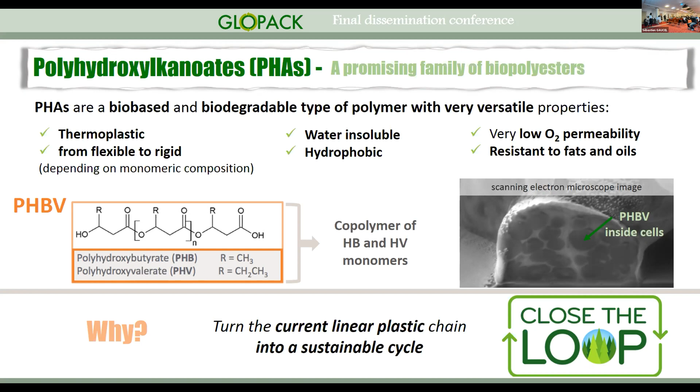They are also water insoluble, resistant to fats and oils, and have a very low oxygen permeability, which are all good characteristics to be used as a packaging material. In specific, PHBV is a copolymer of HB and HV monomers, and they have improved mechanical and thermal properties in comparison with the homopolymer PHB, which is the most studied PHA. And it is important to overcome the technical obstacles associated with PHBV production, to turn the actual linear plastic chain into a sustainable cycle.

The commercial PHAs are currently produced using pure cultures, and they are fed with high purity substrates. In this type of process, there is a need for sterility and strict control, which means they are high energy demand processes. And the cultures are usually fed with pure glucose or corn steep liquor, which are pure feedstocks, and they account for almost 50% of the total production costs. So this makes PHA have a very high price to be used as a commodity material.

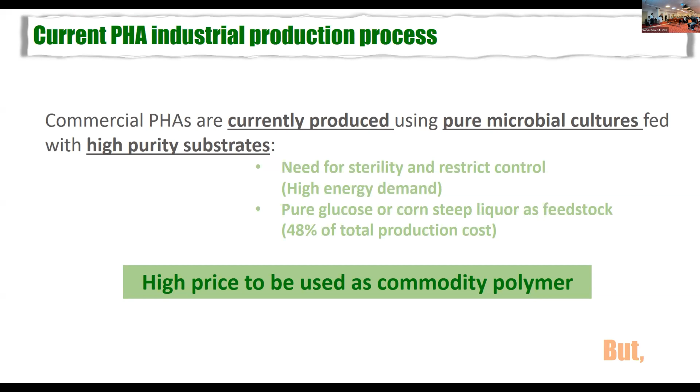Over the past 20 years, an alternative process based on the usage of mixed microbial cultures and residues has been developed. So I can tell you straight away that it is possible to produce PHBV from various agri-food feedstocks. This process usually comprises 3 steps. We have an acidogenic reactor here, where the organic carbon of the feedstock is converted into a mixture of soluble fermentation products, which are PHA bioprecursors.

And then we have 2 aerobic reactors. The first one, where a mixed microbial culture is selected based on the PHA storage ability through inducing periods of feast and famine. And then we have the PHA production, where this culture is inoculated and fed with the soluble fermentation products produced in the acidogenic reactor until they achieve their maximum PHA capacity. Then the PHA is downstream processed, which means it is extracted, purified, and dried, and we obtain a pure PHA at the end.

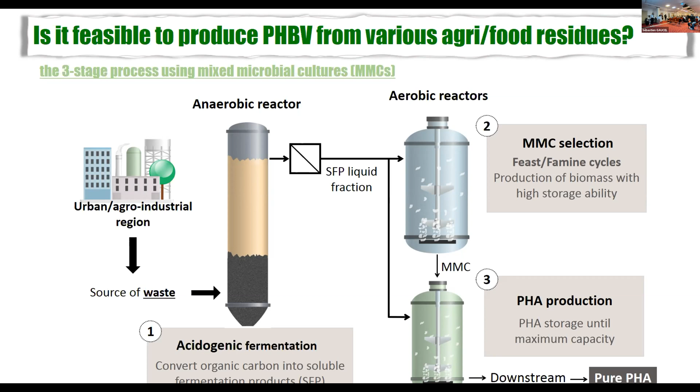During the Glopack project, IBET was in charge of optimizing the PHA production efficiency and producing 50 kilos of PHBV. We were mostly working on work package 2 of the project, and we used fruit waste as feedstock. This feedstock is globally produced in large volumes. It accounts for up to 60% of the fruit production. In our case, it was supplied by a Portuguese fruit and vegetable processing company, and it is obtained from the stored barrels that do not comply with the criteria to be processed.

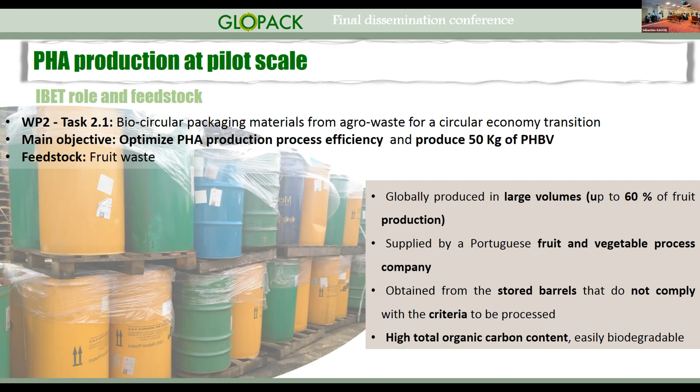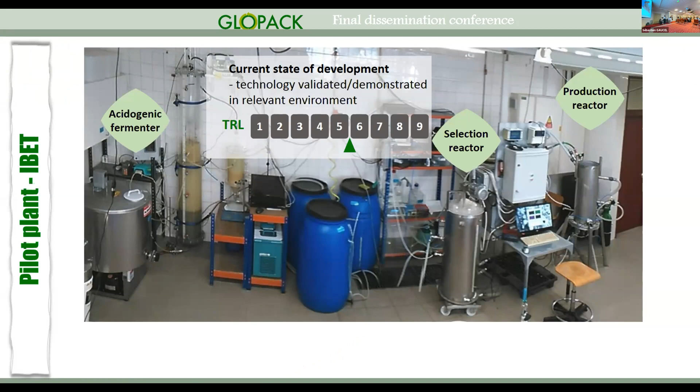This feedstock has a high total carbon and organic carbon content, which means it is easily biodegradable, which increases the potential to be converted into soluble fermentation products and, of course, into PHBV. So here you can see our pilot plant. We have 3 reactors to perform the 3 steps of the process. We are currently at a TRL between 5 and 6.

We operated the first reactor, the fermentation reactor. It is a 60-liter upflow anaerobic sludge blanket reactor. We operated it at 30 degrees, and we adjusted the pH, trying to control the PHBV composition, which means the HV monomeric composition of the PHBV.

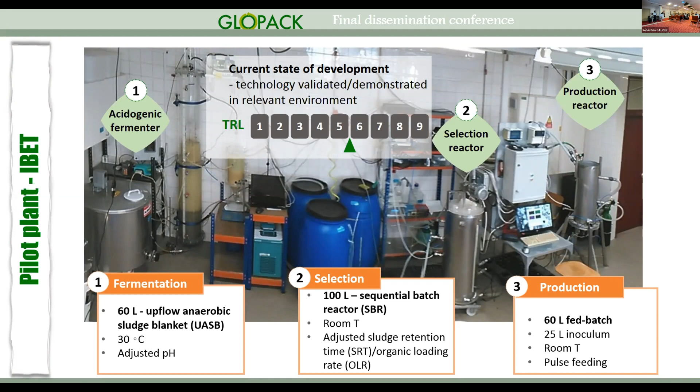Then we have a selection reactor, which is a 100-liter sequencing batch reactor. This reactor was operated at room temperature, and we adjusted some operational parameters such as the sludge retention time and the organic loading rate, trying to optimize the efficiency of the culture. And then we had the final reactor, which was a 60-liter fed-batch reactor inoculated with 25 liters of inoculum from this reactor. It was operated at room temperature, and the culture was pulse-wise fed.

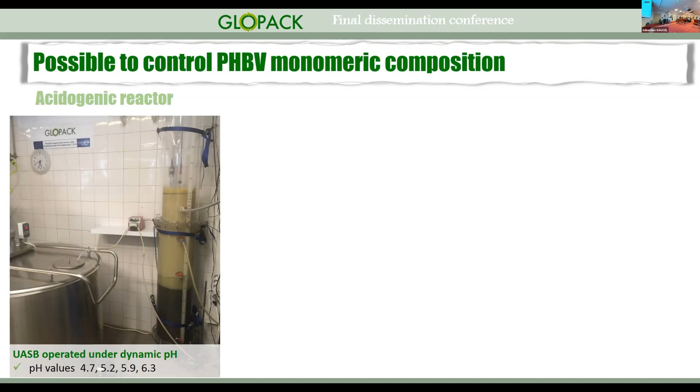So the first research work that we did during the Glopack project was to understand if it is possible to control the PHBV monomeric composition with one single system and using the same feedstock. So to do that, we operated the first reactor under dynamic pH, trying to change the soluble fermentation products produced. So we tested 4 pH values.

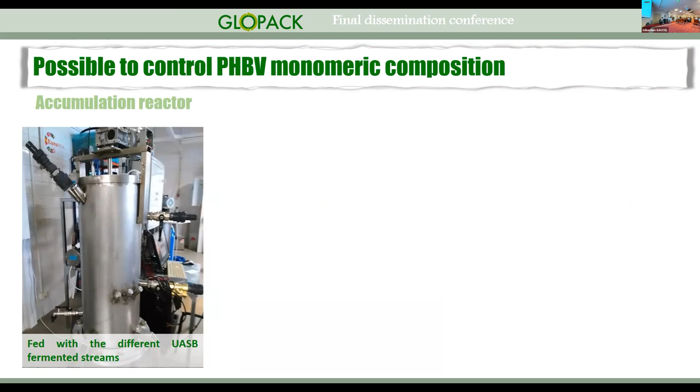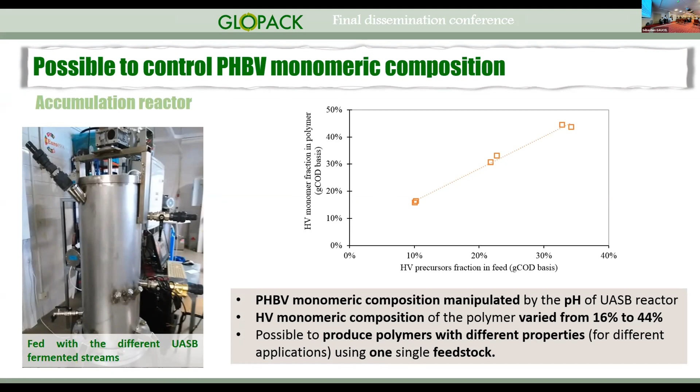Then we tested each one of these streams in the production reactor. So we fed the culture with those streams. And we saw that actually the PHBV monomeric composition can be manipulated by the pH of the UASB reactor. You can see here that the HV monomeric composition of the polymer varied between 16 and 44%. So it was possible to produce different polymers with different properties, which means for different applications, using one single feedstock and one single system.

Then we tried to control the sludge retention time and the organic loading rate of the selection reactor, this reactor here. So we operated 2 SBRs with 2 sludge retention times, 4 days and 2 days, and we 4-step increased the organic loading rate until a maximum of 14.5 grams of COD per liter per day.

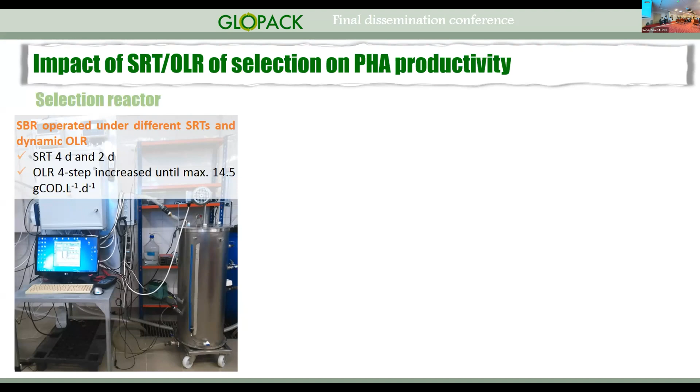We saw that the biomass productivity was similar for both reactors, for each organic loading rate, but the culture selected at 4 days of SRT had a higher PHA accumulation capacity. So this reflected on the global productivity, which was 80% above that achieved for the 2 days of SRT. So we saw that higher SRTs favored the global process performance.

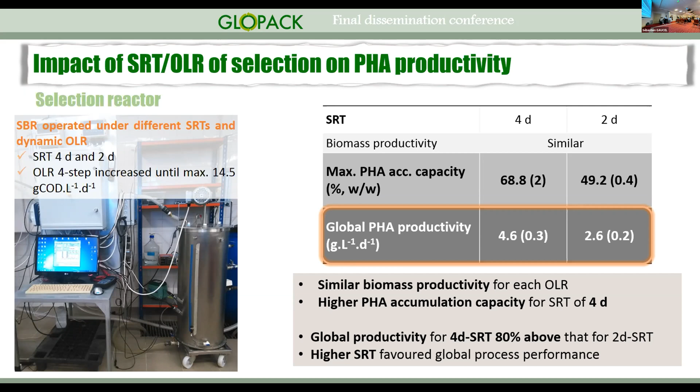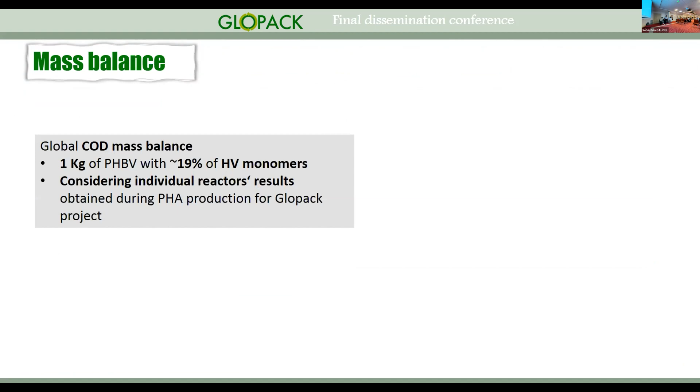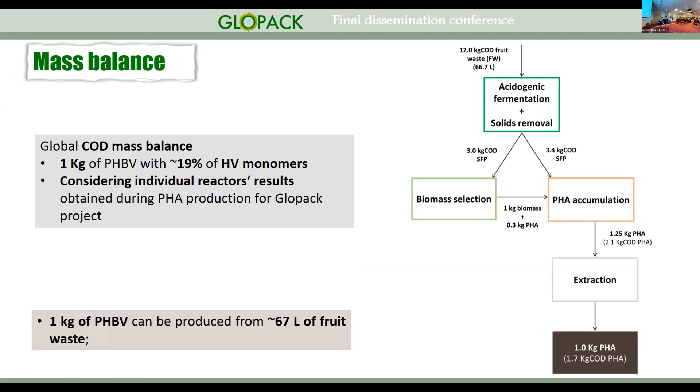We also did a mass balance considering the production of 1 kilo of PHBV with 19% of HV monomers, and we considered the individual reactors results achieved during the PHA production for the Glopack project. And we saw that 1 kilo of PHBV can be produced from 67 liters of fruit waste, which is a result that is in line with the literature results.

During the pilot plant operation, we faced some roadblocks. We tried to have a solution for each one of them. First, we saw that the feedstock had a high solids content. So we had to install a decanting system in continuous mode to filtrate the feedstock after the acidogenic fermentation and to have better results in terms of purity of the polymer. Then we saw that the feedstock varies along operation because it is a waste, so it is normal. But the culture was very well selected and adapted well to the variability of the feedstock.

We had some problems in the extraction process, which was done by another company. Those problems were mostly related to the variation of the culture along operation to give a response to the feedstock variability. And they also saw excess of foaming and heating at a certain point of the extraction. So we had to tightly control the PHA content on biomass, adapt the extraction method and do the extraction in smaller batches. Then we saw that sometimes there is a high level of impurities on the polymer. So we installed a second round of purification.

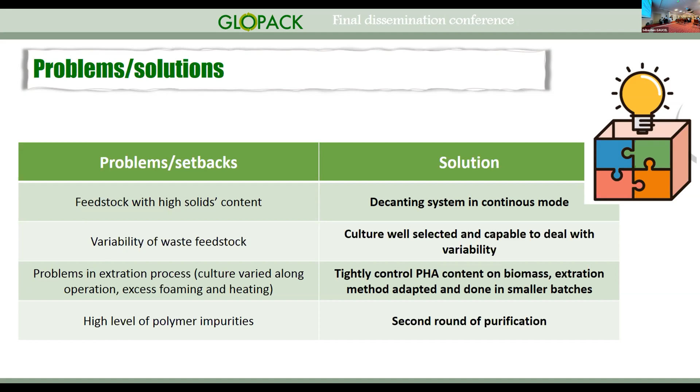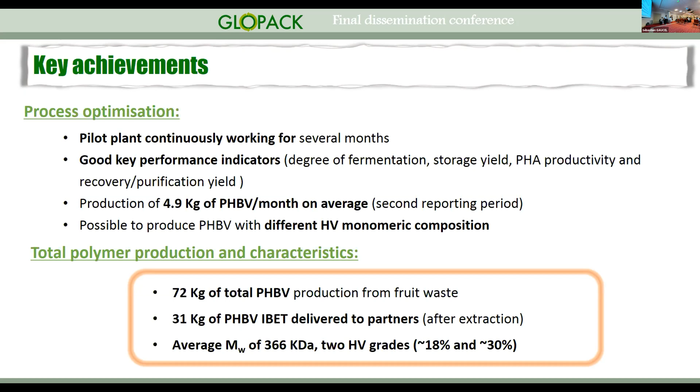In sum, we were able to continuously operate the pilot plant during several months, and we achieved overall good key performance parameters. We produced an average value of 4.9 kilos of PHBV per month, and we saw that it was possible to produce PHBV with different monomeric compositions. In total, we produced 72 kilos of PHBV from fruit waste, and we delivered to partners 31 kilos after extraction. The polymer had a good average molecular weight, and we sent polymers with 2 HV grades, 18% and 30%.

For the future, we think that it is important to optimize some operational conditions and to analyze the possibility of recycling processed wastewater to decrease the tap water consumption, to study online monitoring techniques for better process control, to develop predictive models for process optimization and to design large-scale plants, and of course to demonstrate the PHBV production from different organic residues at a larger scale.

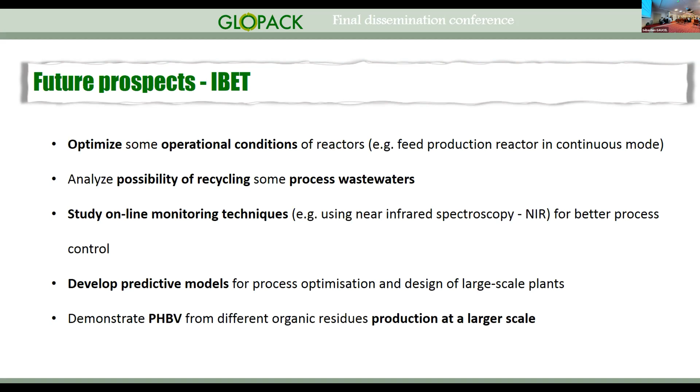Now we're going to do the transition for my colleague. That's right. Simone. Thank you very much, Mario. Thank you very much. We're going to pass straight on now to Simone Nortilli. Good morning, Simone. Good morning. Can you hear me? Yes, we can hear you. Okay, perfect. Do you want me to share my screen, or how do you want to proceed? No, we don't need to do that. You can just say next, please. Okay, so next, please. Perfect. Thank you for the introduction.

First of all, good morning to everyone. I'm Simone Nortilli. I'm going to talk about the Innoven role inside the Glopack project and especially the PHA production at pilot scale. As Mariana explained to you before, together we were in task 2.1, so in the PHA production, but the main difference was the feedstock, which was made of agricultural residues, and especially corn cob. Next, please, James.

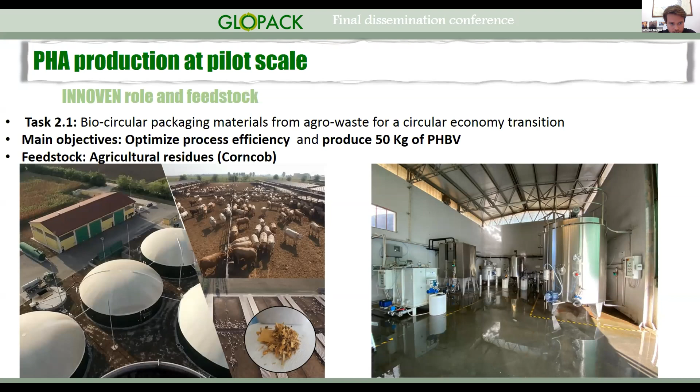As you can see, just to have the overview of the plant for the operational condition, we were inside an agricultural society very close to Verona, inside which there were 2 full-scale anaerobic digestion plants, and we were fed daily by this company for our activities.

Next, please, James.

This is just to make you understand how we proceed, the general overview of our pilot plant scale. So starting from the early stage, you could see that the material was fed inside this external storage tank and subsequently ground and pumped before being charged inside stage 3, in which we obtain the fermentation for the volatile fatty acid production, which is an important step for the mixed microbial culture and PHA production.

Then we had to separate this fermentative product by the use of a screw press and divide the solid fraction from the liquid one containing our volatile fatty acids. Just to show you that the current state of this development and the pilot plant in terms of TRL is between fifth and sixth.

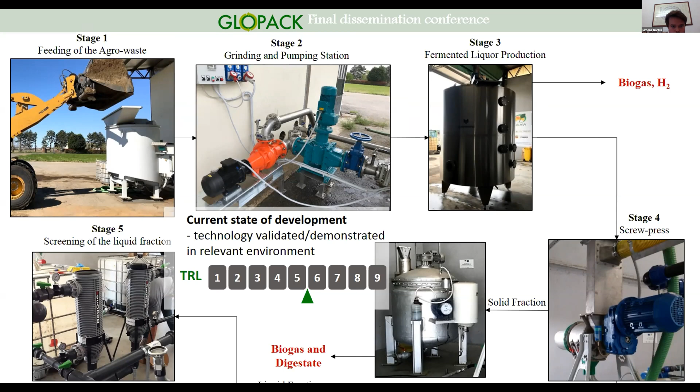Please, the next one, James. No, one before. The one before, okay, perfect.

Then once we recover the volatile fatty acids, this has to go inside the 2 stages 6 and 7, in which we first select the biomass able to store the PHA, and then we accumulate. So we actually produce the PHA that you can see in stage 8 and 9, in which we try to thicken the biomass, so concentrate the biomass as much as we could, and then it's ready for the downstream process, so for the extraction and purification that you will see later.

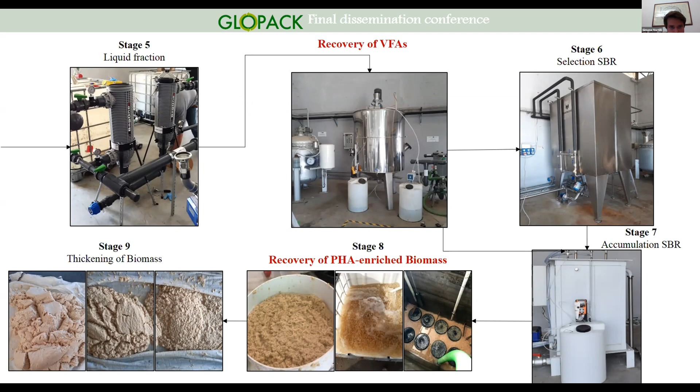So in terms of results achieved, this is the fermentation unit, a big fermentation unit with a volume of around 4 cubic meters for the production of VFA. The operative conditions that we adopted were an HRT of 4 days, always conducted in anaerobic conditions at a mesophilic temperature, so between 35 and 37 degrees, with an organic loading rate of around 18 kilograms COD per cubic meter.

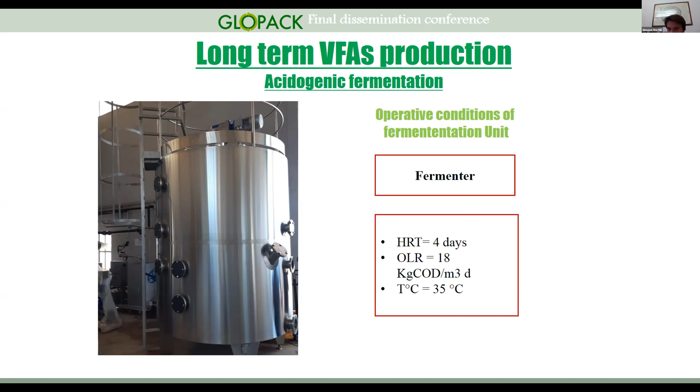Next one, please. In terms of volatile fatty acid production, this is the overall production that we kept in grams O2 per liter, which is around 10, and as main product acetic acid, followed by propionic acid and the other long chain volatile fatty acids. Next one, please.

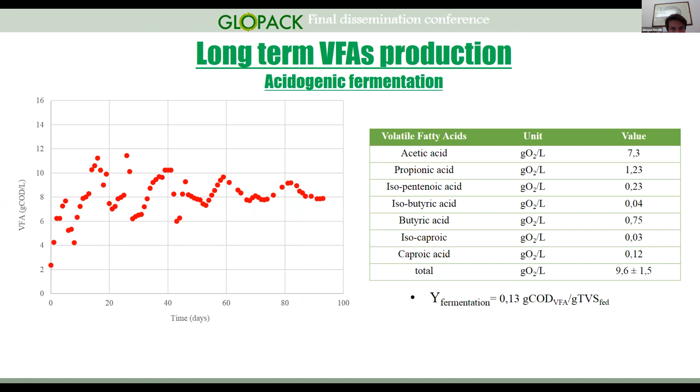After we obtain the fermentative product, this has to be filtered in order to have a proper selection and accumulation process. And we faced here the first problems related to this material. As you could see, in fact, the total solids in the liquid fraction were still high, even though we tried to filter using the serial filter you could see from the picture. And a lot of total suspended solids and inert material.

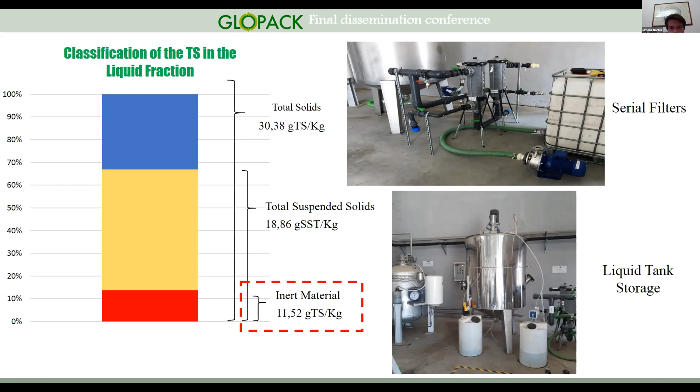So, for instance, fibers, salts, and probably lignin coming from the agricultural residues were still present inside this liquid, and we were trying to solve this problem. Next one, please.

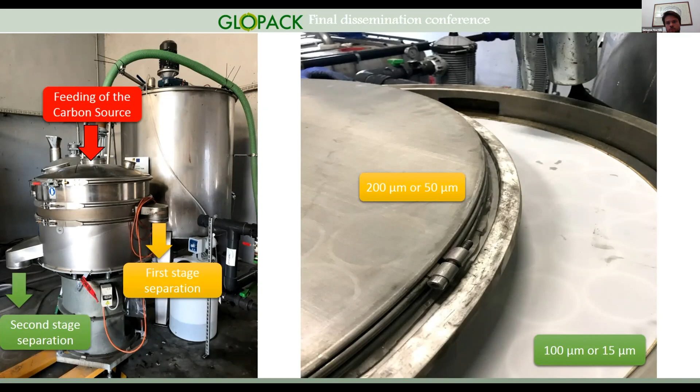We tried to adopt this system, but it wasn't significantly efficient, because in terms of total solids and total suspended solids, we decreased them a little bit, but not completely. And in terms of distribution of solid and liquid phase, we could see that the volume of the permeate recovered was best achieved by using a 100 micrometer first stage layer and a 50 micrometer second stage layer. So further analysis on advanced filtration technology has to be developed.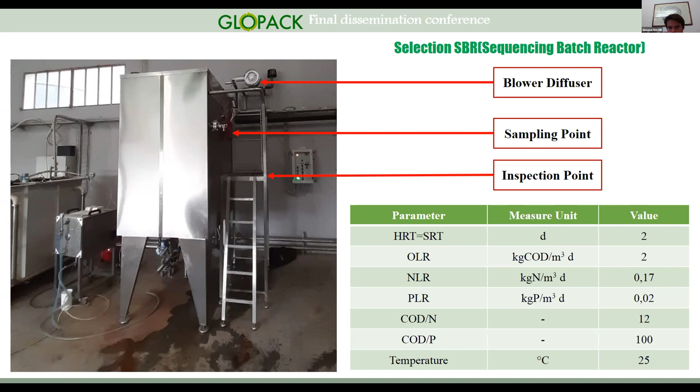Especially, we kept an HRT equal to SRT of 2 days, and an organic loading rate of 2 kilograms COD per cubic meter per day, at a temperature kept constant at 25 degrees, with the nutrient ratio that you could see from the table. In terms of volume, it's a big selection batch reactor because, as you could see, it was around 2 cubic meters. Next one, please. And this one is the following step of the process, the accumulation SBR.

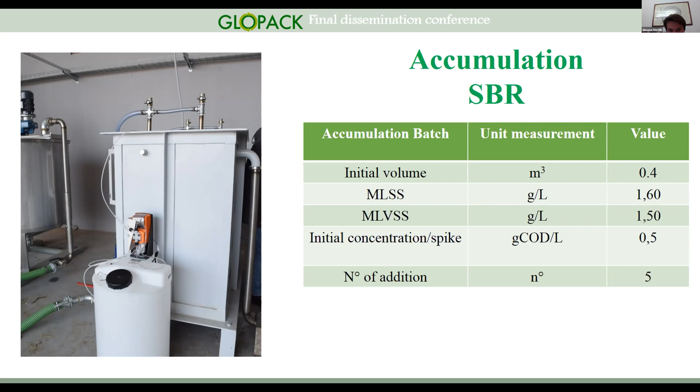Even in this case, the biomass in terms of grams per liter was approximately 1.6 grams per liter at the start of this step, and we fed this reactor by a spike of VFA consistently at 0.5 grams per liter per addition, and we achieved the, let's say, best condition and accumulation by the addition of 5 of these spikes. Next one, please.

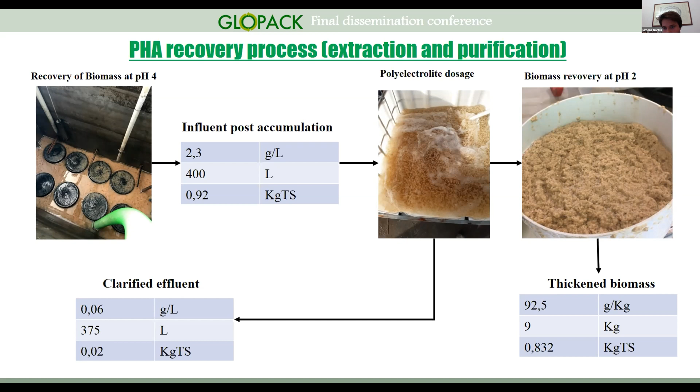Okay, we arrived at the end of the process of biomass enriched PHA, and at the end of the accumulation step, we had to recover the biomass and first stop the microbial activity by reaching a pH of 4, and then try to concentrate the biomass and separate it from the water and solids still present inside the reactor by using a polyelectrolyte and taking again the biomass to pH 2. Next slide, please.

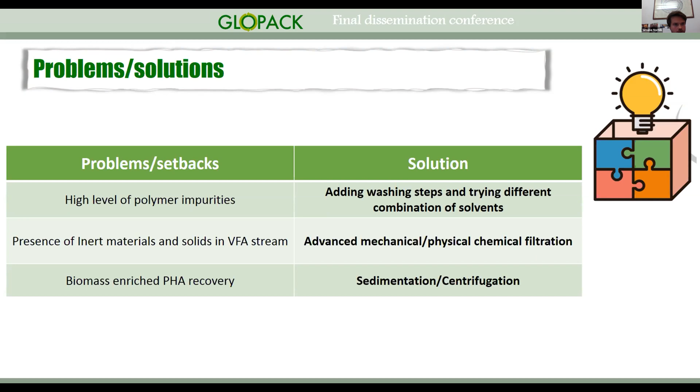Next one, please. So just to answer the initial question of the presentation, is it feasible to produce PHBV from various agri-food residues? Yes, it is feasible, but of course, part of the process still has to be optimized. In fact, the pilot plant has been modified from the initial state by us to improve the PHA production. We reached a production of around 10 kilograms of biopolymer, but of course, due to the difficulties encountered in separating the inert materials from the fermentative product and the difficulties encountered in setting up a proper extraction and purification protocol, it is possible, of course, to produce PHA with HV, so valerate content, around 10–15%.

We obtained a fermentation yield in line with the literature data, and it is possible to obtain a yield of around 6 kilograms of PHA per ton of corn cob wet weight, but of course with the improvements required in both clarification of the VFA stream and the extraction and purification protocol. Next one, please, which should be the last one.